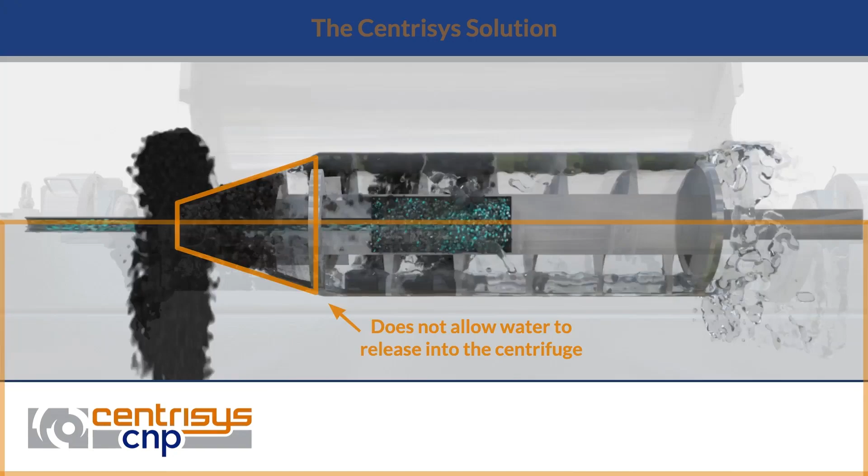That's what others use as a modified dewatering centrifuge. Notice this whole area where the conical section is - this area is wasted because it's full of solids. Water cannot release back into the centrifuge, so it's doing nothing for clarification. That's why we decided to utilize the whole length of the centrifuge and created the THK.

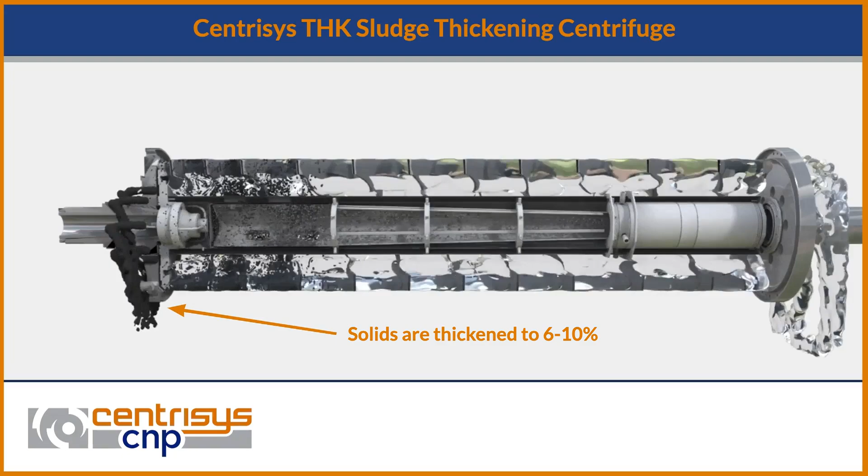The THK is not a modified dewatering centrifuge. It is a centrifuge designed for thickening any kind of waste - activated, primary, or even protein and yeast - just to thicken it to about 6%, 8%, or 10% solids.

Similar to the dewatering centrifuge, solids are accelerated, collected on the inside of the drum, and then continuously pushed through the centrifuge to be discharged on the solids end, while the liquid travels back inside the centrifuge and is discharged continuously on the liquid end.

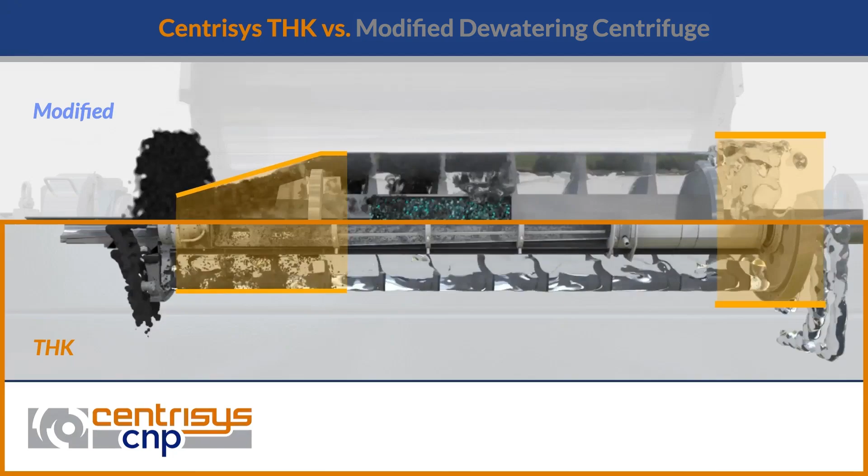Here we show again the whole area where the conical section of the modified dewatering centrifuge is wasted. In the THK, that whole area is a clarification room, so we have a much larger clarification area over the whole centrifuge. The whole centrifuge is cylindrical, so the clarification volume, or the G volume, is the largest possible.

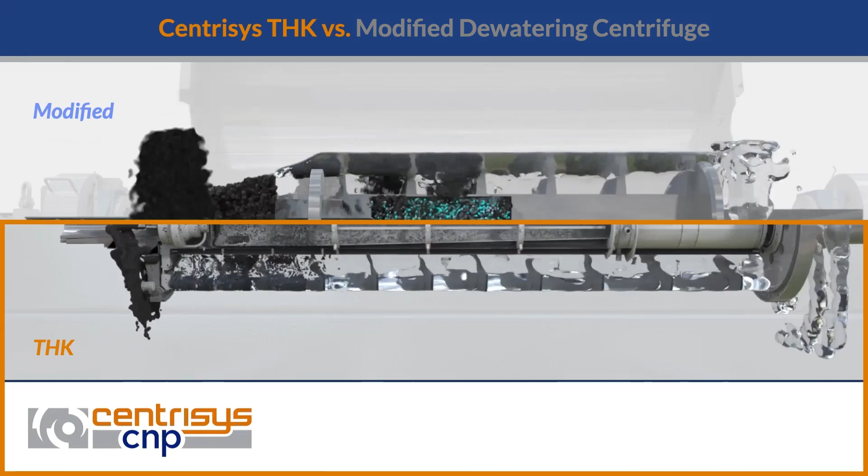In addition, we discharge the liquid as well as the solids on a very small diameter, which increases the G volume as well. We also installed a baffle, so the solids seal the area between the bowl and the scroll. The solids are then pushed underneath and travel to the left side of the baffle, traveling through the system of communicating piping equal to the level of the water in the centrifuge itself.

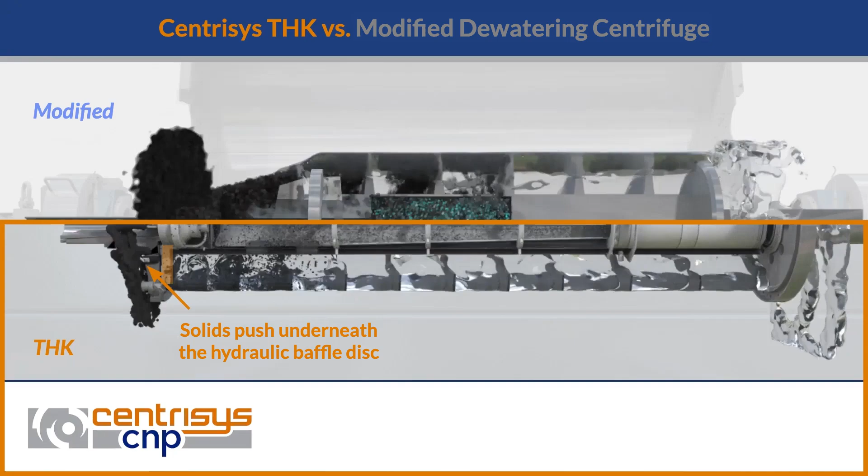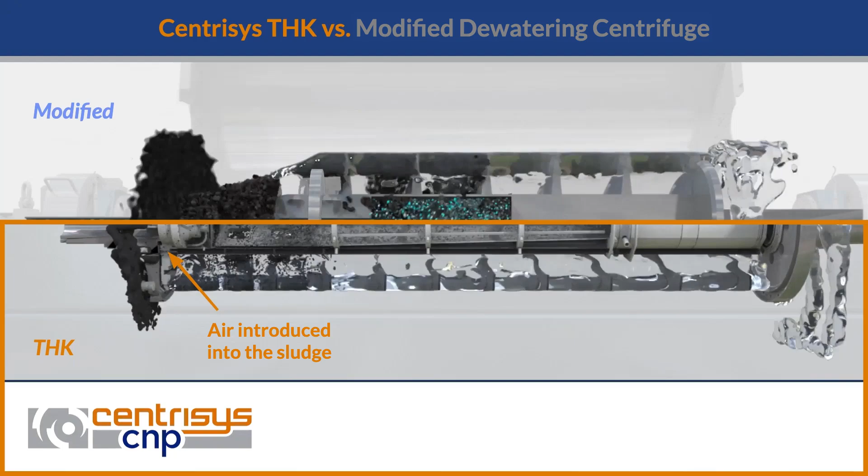To discharge the solids continuously, we add air into the solids here. The air decreases the specific gravity of the solids. The specific gravity of water equals 1. The specific gravity of the solids with air equals 0.9 to 0.95. So the hydraulic level of the water is capable of pushing the solids continuously out of the solid discharge on the THK.

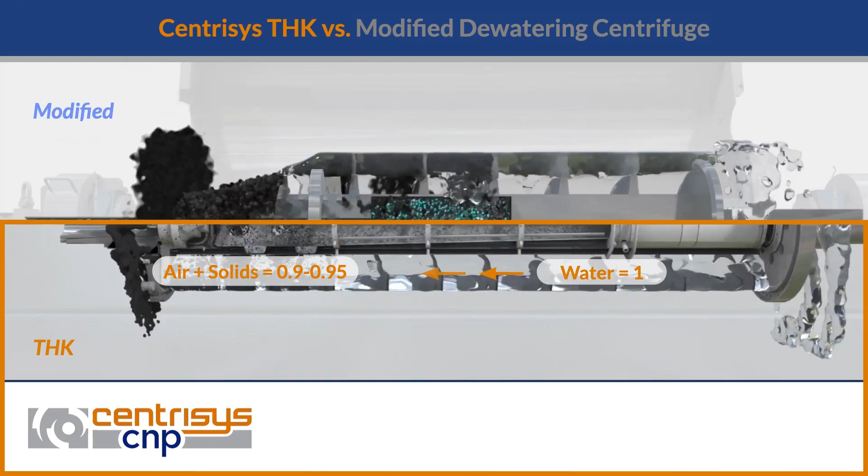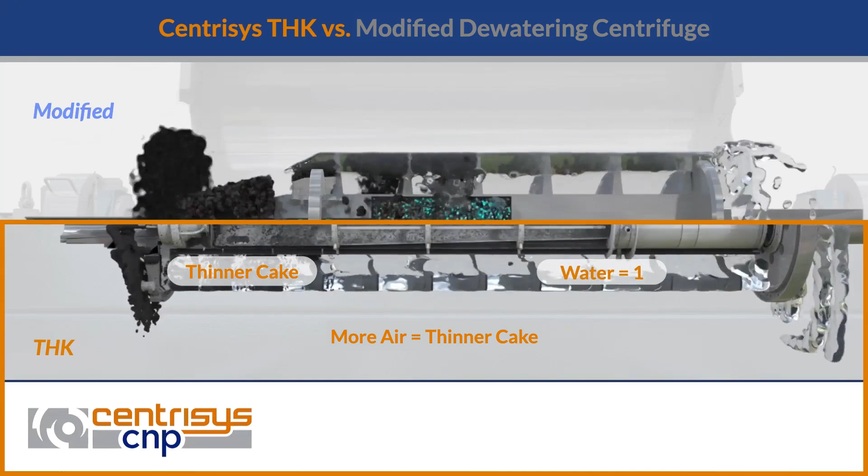With the addition of air, we can specify what kind of cake solids we want. If we want thinner cake, say 3%, then we put more air, which makes the solids lighter. Therefore, the hydraulic level of the water pushes the solids continuously out of the centrifuge. This is the air injection - you see little bubbles come up right here, and it is continuously increased or decreased to maintain constant cake solids out of the THK.

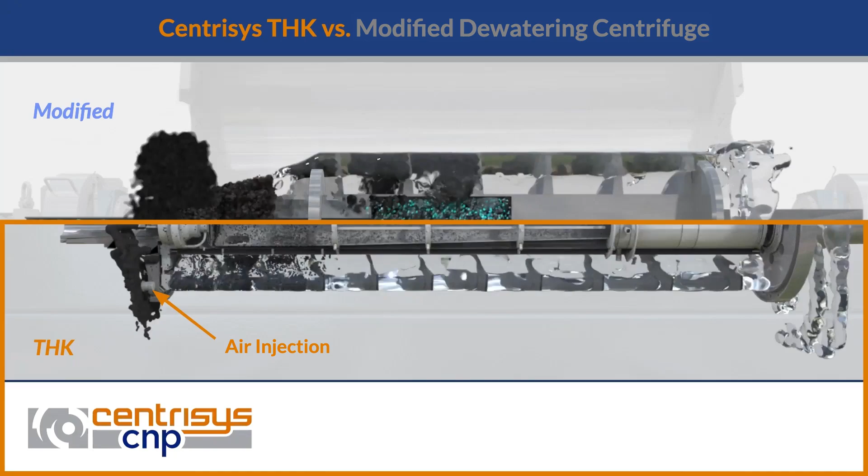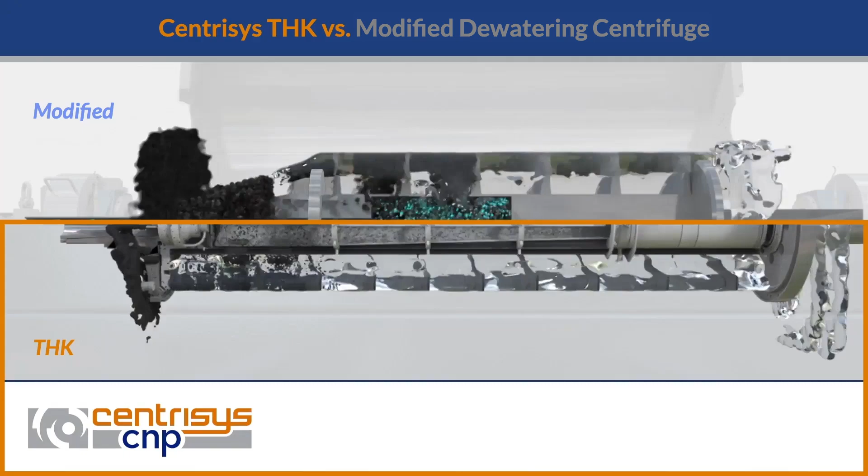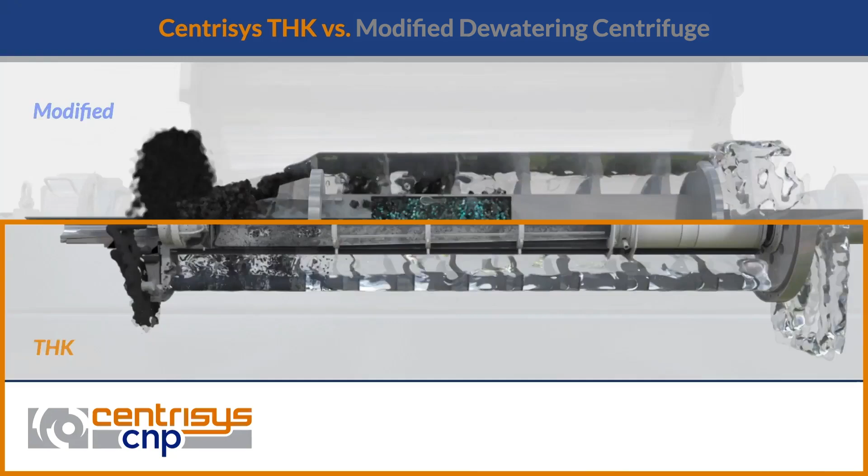When other manufacturers use a modified dewatering centrifuge design, polymer is almost always needed. In the majority of scenarios, the THK does not need to use any polymer. But if the sludge volume index is too high or we want to increase the flow rate, we can add some polymer. We have the whole clarification area except the area where the injected polymer is utilized.

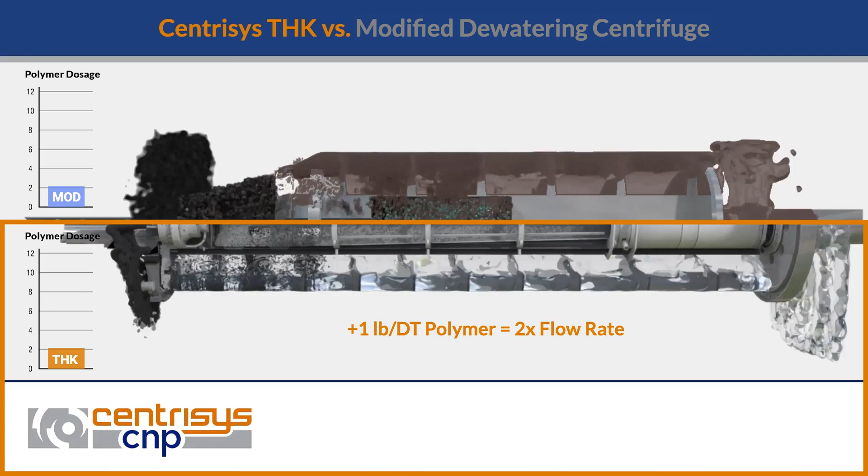By adding polymer into the pool, we only have to polymerize small particles that settle down. That increases the clarification volume in the centrifuge. By adding the polymer in small amounts, anywhere between a maximum of 1 to 2 pounds per dry ton, we can basically double the flow rate to the THK centrifuge.